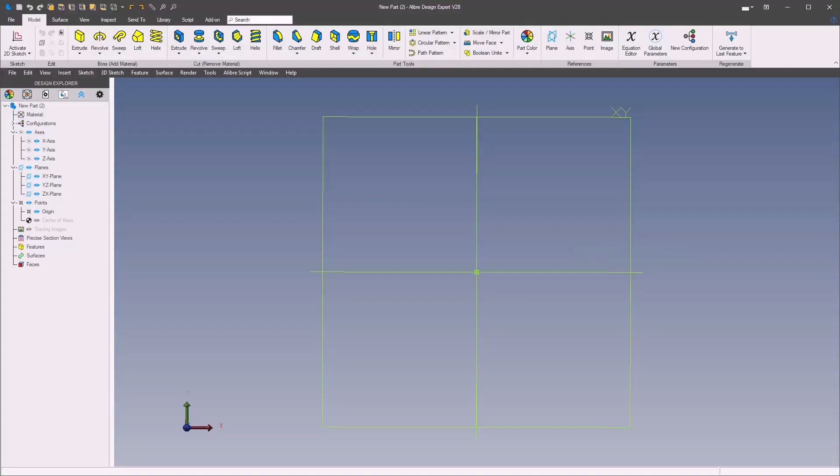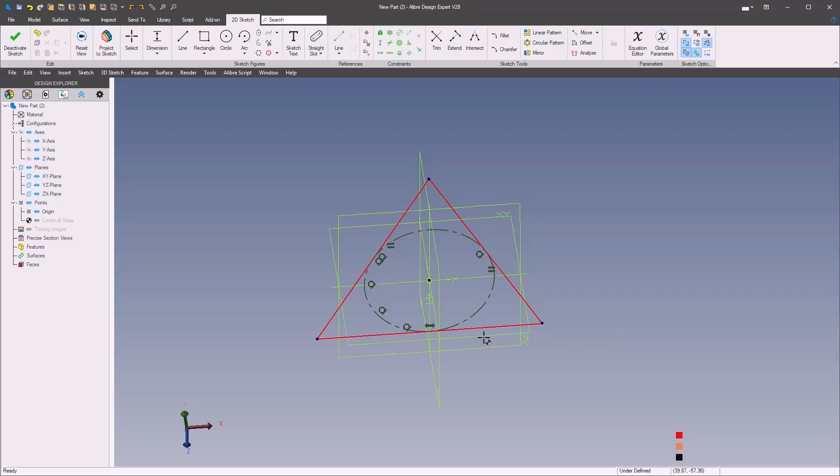So let me get started here in Alibre on the ZX plane. I'll start a sketch and we'll go to the polygon tool and key in 3 sides and just drag that out, apply and close. Then on this line here we'll make this horizontal and dimension this to 90, and that gives us a completed sketch there.

One thing we need to do here though is go up to our ribbon and do an insert point from sketch, and we'll grab this end point here and apply and close that, and then we're done with this sketch.

Next thing we're going to do is going to put a plane in here from the central axis to this point. So we'll go in here and insert a plane, grab our axis and our point and apply that, and we're done. Then on this new plane, we're going to insert a new sketch, and we'll just grab a line

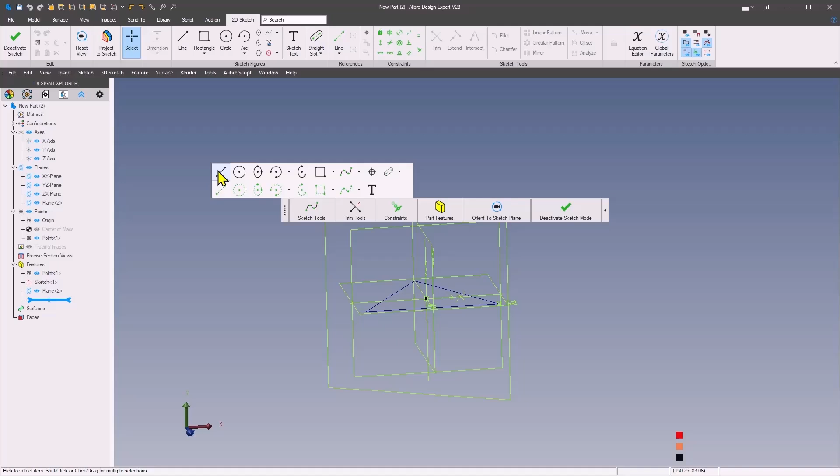and go from the origin, go vertical, and then back down, and we'll make this endpoint coincident to our point on the new plane there. And we're going to dimension this diagonal line to be equal to D1.

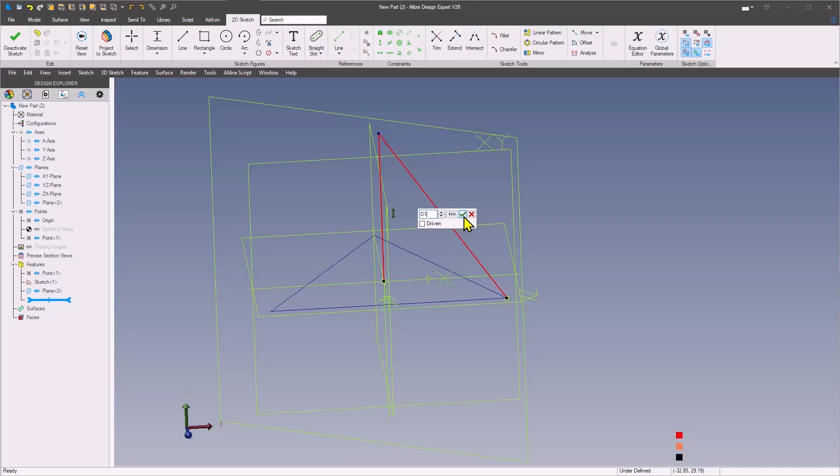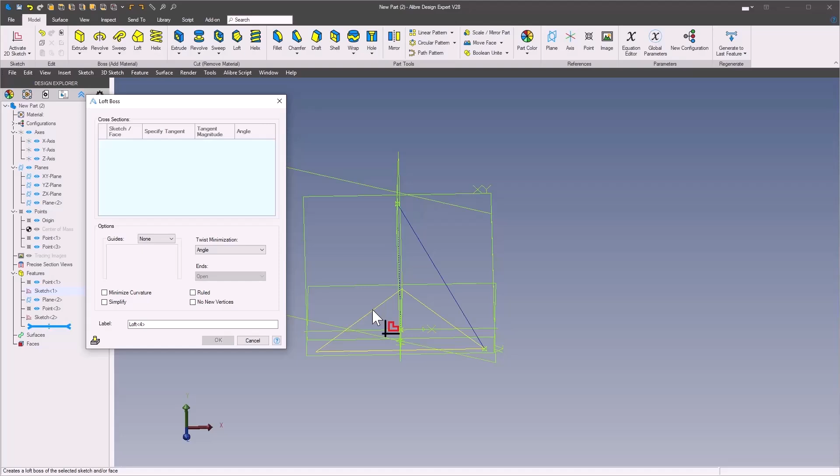And then on the end up here, we're going to insert another point, grab this end node, apply, and now we have a point there. Now we should be able to go up here and do a loft to that point, and we're done.

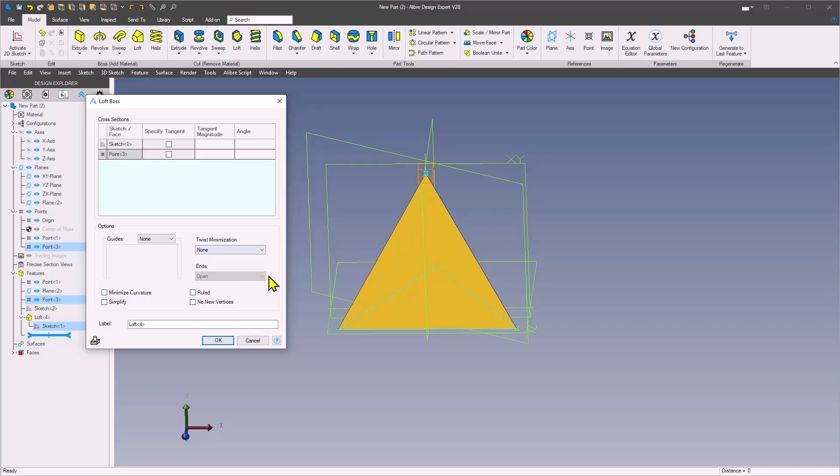And now our line on the edge is 90, and our surface area is 3507.403. So everything works out just fine.

Then it's a matter of just doing your vertical pattern and completing the drawing. So now you just pattern that up 60 millimeters for 3 instances, and you're done.